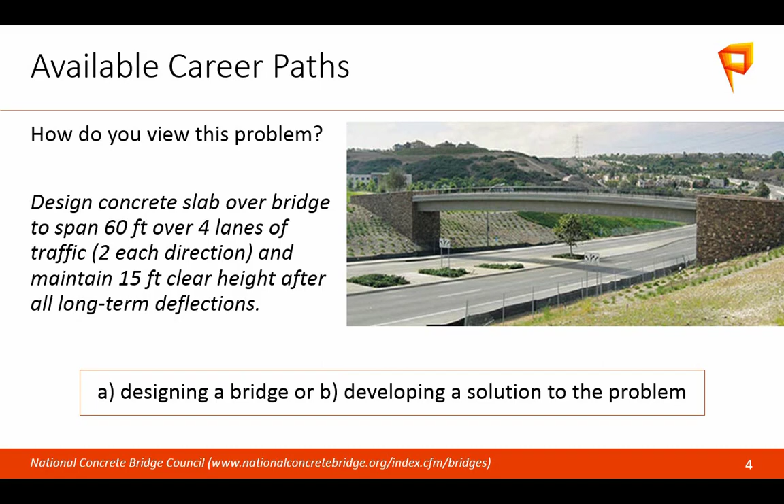There are a lot of different options for career paths in engineering, and how you view that first problem may inform what career options you'd be a good fit for. As engineers at our core, we are trained to solve complex problems by applying knowledge and principles to that problem, and that is not necessarily exclusive to a single career path. Through an engineering degree, you have a lot of different options in front of you. Someone who chose A, designing a bridge, may be more in line with something on the left-hand side here, more traditional, whereas somebody who views it more generally, as developing a solution to the problem, may find themselves a little more to the right, in terms of the options they're looking at.

This list is really just an attempt to categorize some basic options. By no means is it fully inclusive, and I don't mean to offend anybody by these different buckets, but this is just a very basic view of it.

In terms of traditional engineering careers: design engineer, contractor, professor. Less traditional: construction engineer, designing formwork and shoring, forensic consulting, facilities. On the right-hand side, careers where you're still utilizing that problem-solving skill set but in a different application, maybe outside of engineering: attorney, developer, finance. These last three are specific because some of my classmates are doing this exact thing from undergrad and graduate school. My classmates from Florida and Texas are basically across the spectrum on this list, and all of them still benefit from their engineering degree.

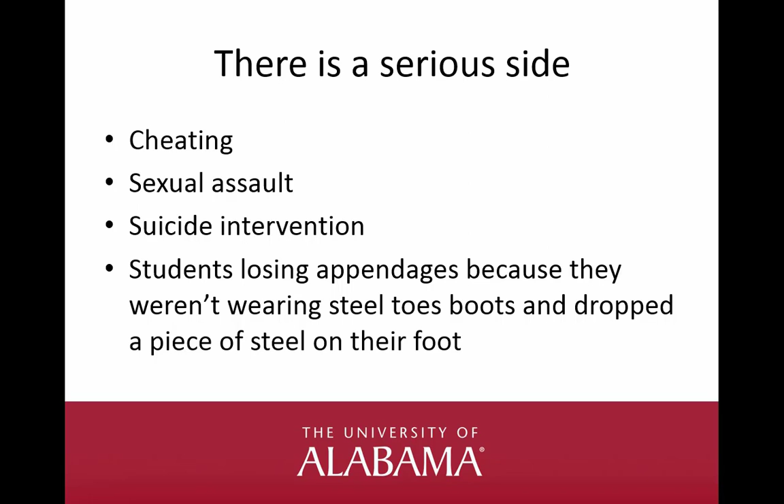Do not wear sandals in the lab. They did get the toe reattached enough that I think he can bend it mostly. That was fun for the janitorial staff to clean up all the blood. So please don't do that.

Professional licensure. Our previous speaker is a PE. I am a PE, and I think several other of the speakers are PEs. It's a great thing to have. But specifically to academia and faculty, if you go and search for academic jobs right now, I guarantee you about 90% or more will have a line somewhere that says, must have a PE or ability to obtain a PE in 4 years. Why is that?

Well, some states require that design courses in engineering curriculums must be taught by a licensed professional engineer. The states that don't require that explicitly are moving to consider that. And ABET, which accredits civil engineering and other engineering programs, is moving towards having more and more faculty be professionally licensed. To some degree, it indicates that you're not always up in the clouds, because I'm sure you've had professors that you would be troubled if they designed a bridge, because maybe they don't know how it works in the real world. So this requirement of a PE is kind of to address that issue.

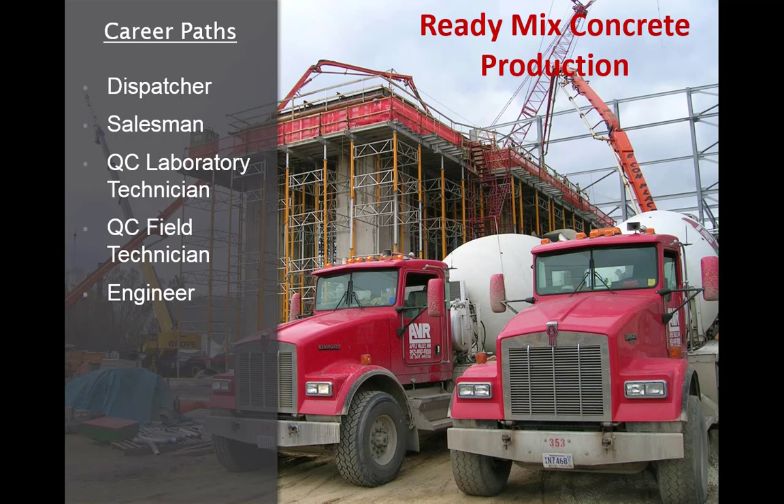We've got concrete all the way from 100 PSI, kind of lean fill flowing sand, all the way up to 18,000 PSI concrete for high-rise structures. It's amazing the amount of things we can do with concrete, and it's just a ton of R&D. I have 3 lab staff, and that's all they do all day, just make concrete we haven't even produced in mass quantities yet, for the next stuff, admixtures, that kind of thing, and figure out what we can do better.

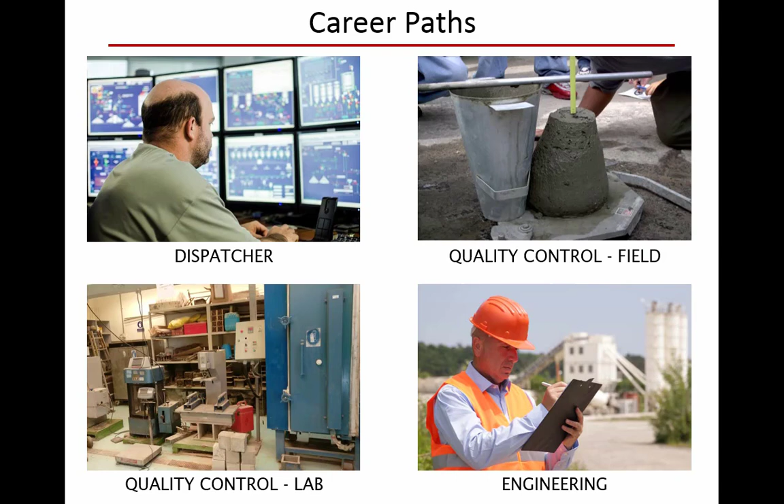So that's what a lot of those guys do for me on any given day. I have 3 field quality control guys as well, so they'll go around to the jobs every day and make sure that concrete is meeting specifications. They do a lot of arguing for us. They're kind of our last line of defense to make sure that truck that shows up on site gets poured, because the last thing we want to see is that truck come back to the yard full of concrete and then we have to throw it away.

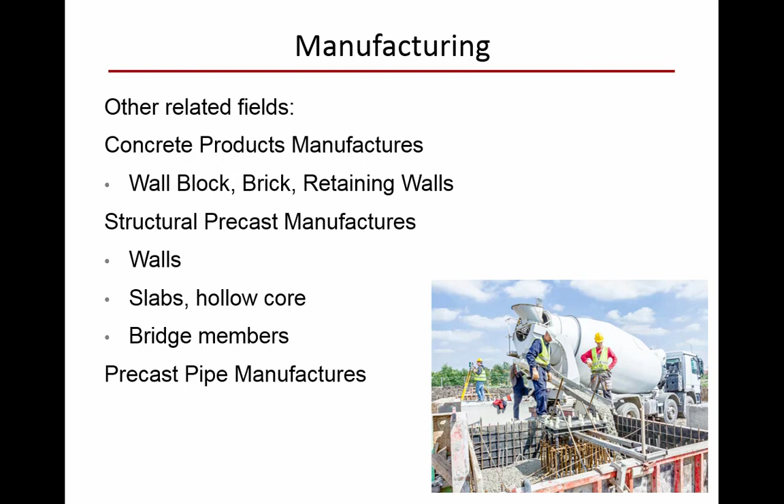So I'm just going to mostly focus on ready-mix concrete today because that's what I do, but these positions exist in pretty much all of the manufacturing fields. There's precast operations, making concrete precast elements at a yard, very similar to our plant, but they'll make and cast that thing there, let it get hard, and then ship it out to the job site. There's precast pipe, there's all the concrete products, making retaining wall block out of concrete, and all these other kinds of stuff. They'll have all the same job opportunities that I talk about in a lot of those other facilities. And with the consolidation of our market, there's not a lot of really small ready-mix producers anymore. They're kind of grouped up and become monsters like us, making 1 million yards in a year. They need all of these jobs filled.

So ACI impacts. I went to about as much school as you can go to, and I can tell you what I do on any given day was not taught in school. You'll learn about concrete materials in school for maybe a semester at best.

And then after that, you just do this funny hash mark whenever you're talking about concrete in a drawing or something like that. You don't really ever get to know how that concrete is really made. You'll know the basics, of course, but you'll have absolutely no idea on how it's really made. If this sounds of any interest to you, just call up your local ready-mix producer. I guarantee they'll give you a plant tour, and you can actually go visit a plant and see how concrete is made.

I got the lion's share of my education from going to ACI and networking with professionals, meeting all of the people that were doing some of the things we were trying to do. I remember when we started to get into self-consolidating concrete and mass concrete, I made sure I got myself on the SCC committee or the mass concrete committee to learn as much as I could.

With SCC concrete, you're making concrete that looks nothing like any concrete you've ever seen before. It's super scary. You're going to send this truck out with a 22 to 26 inch spread. We had a lot of times where we'd send it out to the job and the contractor would reject it, saying, you had to have screwed this up, this doesn't look like anything I've ever seen. And we'd say no, we spent a lot of time making sure it looked like that, just trust us, it's going to be okay. All the while we're thinking, man, I hope this turns out right, because this is the first time I ever made this.

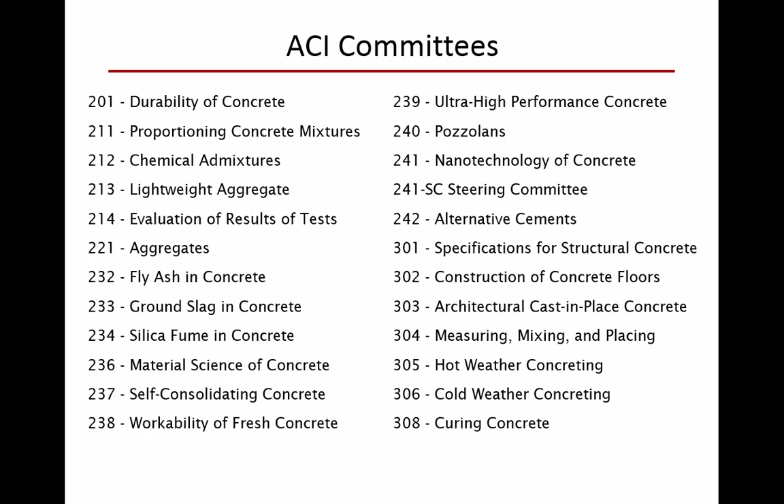Job opportunities, it's amazing what you can learn in this job in pretty short order. So this is just to give you a little glimpse at the numbers of what a day looks like in ready-mix concrete.

On any given day, we'll have orders being placed with our dispatchers. We'll have 100 plus contractors that we work with, and they'll be ordering concrete for 200 plus jobs on any given day. Each one of those jobs will have somewhere between 5 to 10 mix designs that contractor can choose from. Contractor A is going to be pouring footings today, he wants 50 yards of that, and he wants a truck every 10 minutes. So that's what that dispatcher is putting in. Hopefully he chooses the right mix, and all of that goes according to what it should.

And they're going to send those orders out to the concrete plants we have, hopefully strategically placed around some type of metro area. Those plants are all different, in different locations in the city. We have 10 plants in and around the city of Minneapolis. They all have different cement and fly ash combinations, they all use different aggregates, they have different batch men, and they have one of these 1,000 mix designs to choose from. Again, hopefully they're choosing the right one, hopefully we've sent it down to them that says use mix 1, 2, 3, 4.

And then they're going to put that concrete on one of 150 trucks that we have. That truck is going to deliver that concrete, and it's going to deliver it in traffic, in weather, all the while it's getting old. Hopefully it gets there on time and in spec.

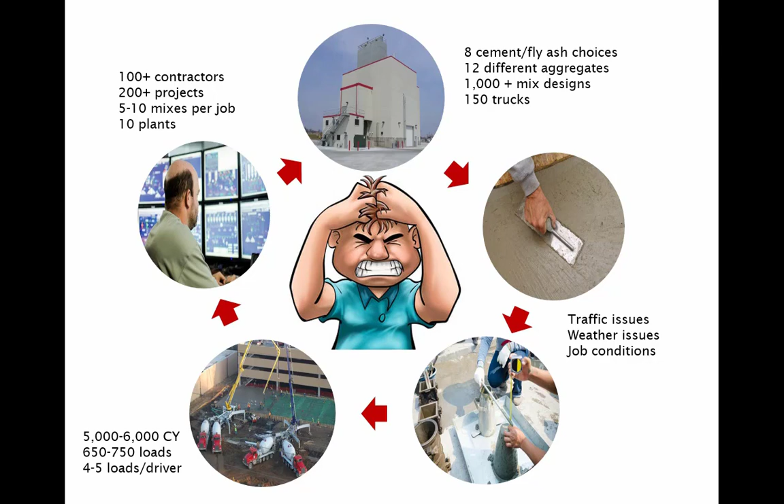You become a huge resource. So you're constantly working with contractors, and all they want to do is get the job done. They know what they need to do. They're going to be heavily reliant on you to give them what they need to make their job easier for them and their guys out in the field.

So I can tell you probably 90% of what I do now is to take concrete and get it to do what it doesn't usually like to do. I'm getting it to flow into places, getting it to get higher strength earlier, getting it to set faster - getting it to do all of these things that I know I can do with concrete, but they haven't learned all of that.

They're contractors, a lot of them know quite a bit about concrete, but with the chemicals we have today and what we can do with concrete - when I started at AVR we had 8 admixtures, now we're plumbed for 24 admixtures in some of our big plants - there's nothing we can't get the concrete to do, provided the contractor calls and asks, hey today I'm going to try this, I need to pump it 200 feet through 3-inch line. There's any number of things we do on any given day, and they become a huge resource in helping that contractor figure out his problems.

And once you do that for a contractor on a couple of occasions, then you kind of have a friend for life, and they're going to call you. I get calls - probably 50% of my calls now are on jobs that we're not even supplying the concrete on.

Like, hey, I had concrete yesterday, it didn't look quite right. Is there something you think we should do? I'll tell them, hey, I think you should call your supplier and ask them if they have X, Y, Z, or ask them if they can do this, or they have a mix that looks kind of like this. When they're outside our market, many times I'll just send them a mix design and have them see if they can make this. That's a huge resource for them, and they're super appreciative.

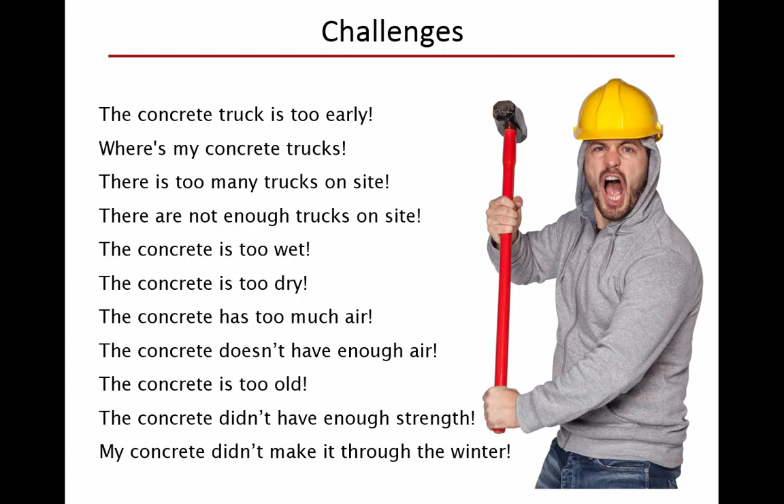So that's all I have. It's a pretty crazy industry, nothing I thought I'd ever get into, but there's a huge number of benefits. The amount you learn in pretty short order is amazing. Great individuals, and they pay super well, as you can imagine. We pour 750,000 yards of concrete a year, each one of those yards is $110, $115 a yard. There's a boatload of cash coming in, so they pay you well.

Another huge benefit is we have no time for any kind of paperwork. It's just do it. There's not a single piece of paperwork that me or anyone who works for me fills out. We have no time cards, we have nothing. It is get it done. I'm going to give you a job, and I'm going to assume you're going to get it done. When you're not getting it done, we'll have a discussion. As long as the concrete's going out there and it's not getting rejected, I'm assuming you're doing your job, and we can talk about vacation time in the winter sometime.

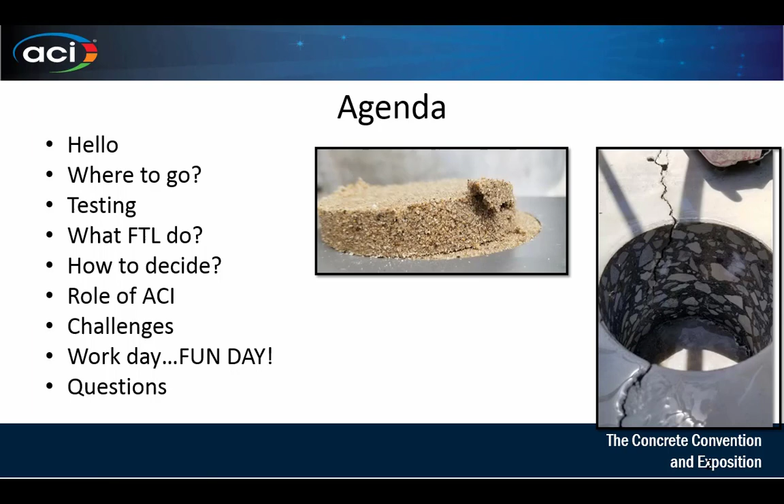I finished my degree in July. Well, let's go to the agenda - just to use it because I put it there. This is the agenda, great. So I finished my bachelor's degree at the University of Puerto Rico at Mayagüez in July 2017, last year, sorry. I started at Flood Testing in November last year, so it's more or less about a year now.

Currently, as they say, we are all liable, so thankfully I don't have the PE yet, so I will be liable at some point. I'm in that way. My career path is kind of the opposite of Mr. Edwards. My background is concrete, and I end up being a geotech.

Construction - I never knew there was a business called testing services in construction when I was in college. So when I got approached by the boss, I was like, oh, what is testing? What does that mean? I know ASTM exists. I know you have to deal with the quality of the stuff, but how is that a testing business? So it's part of the construction part, because you need to make sure everything is working.

So at some point you are all going to get this - this is my actual diploma from the University of Puerto Rico. And then you are like, what do I do? Like, I have a piece of paper that says that I know how to do something, but man, yeah, about that - can be hard sometimes.

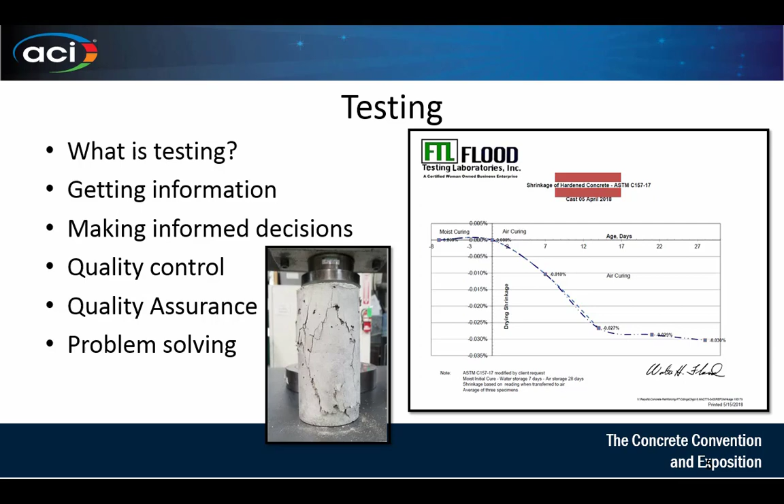Oh, we dumped the truck there, we poured concrete, and it was 10 below. Did you put air on it? No. Yay, take it out. That type of problem solving - and then you have a sheet pile, and the sheet pile is moving, and they call you, hey, we have a crack, 7 inches, and you're like, hey nice, good crack, and you run. But then you have to go back to them, call, and solve it. So this is part of what we do.

The lab has been around for 100 years - 105, to be more precise. So we kind of poke into everything in the Chicago city, from soils to asphalt to concrete to whatever. Basically, if you can build it, we can test it.

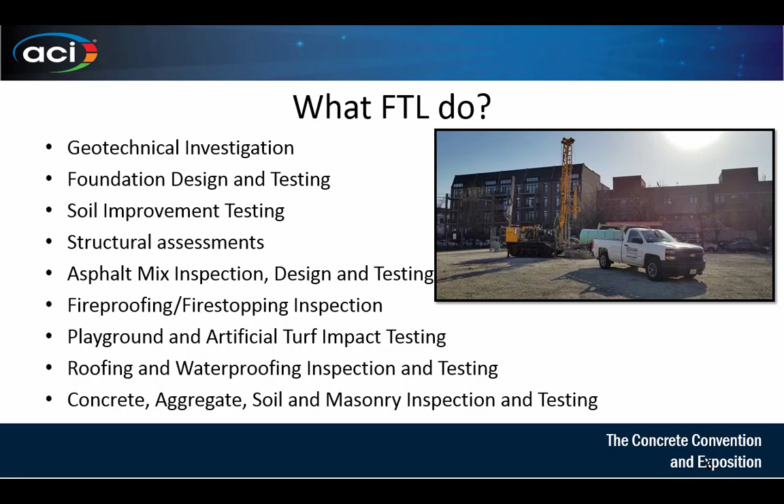That's pretty much it. But after you know this, how do you decide, when you're out of college, what you want to do? It's weird - in my case, I wanted to do my PhD and go back to teaching. That was my career path. That's what I wanted to do.

So I did research for 10 weeks at Oregon State, and then I didn't get the funding. So what do I do now? Well, let's go to work. But how? So the how is...

It's gotta do - so you have to talk to professionals. That's why you come to ACI. You talk to professionals and say, hey, here you have a panel: professors, industry, designers, testing industry. You ask questions like, what do you do, how do you do it, why do you do it. But in my case, I like getting paid for breaking stuff.

But it's your interest and finding your own path. Even though we all have a civil engineering degree, we all don't like the same stuff. So it's you asking questions. And ACI is a very good place to ask those questions.

The role of ACI is very important. Why? Because when you go to a committee, you know the rules of the game. Because if you like to design bridges or design structures, you are going to use ACI 318. Period. There is basically no way around it, unless certain different situations, but you need to use the ACI documents to design and perform.

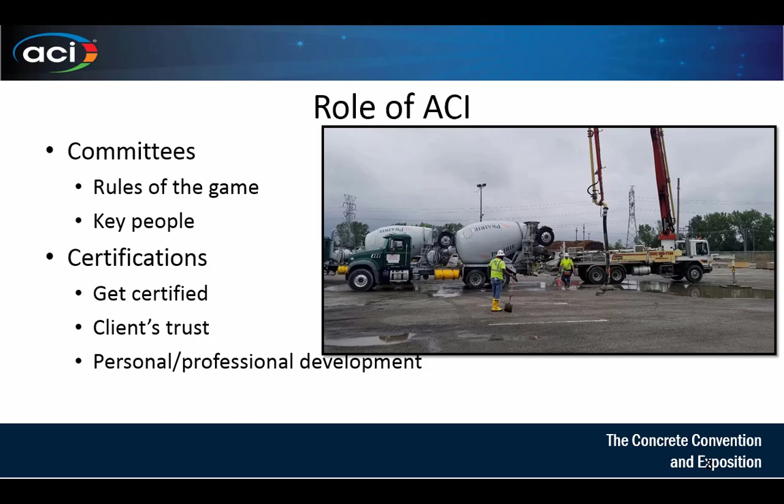As I told my friends, if you're a doctor and you make a mistake, you just put them six feet under and tap the dirt - done. If you're a car mechanic and you make a mistake, the car will be back in two weeks, that's it. If you're a plumber and you make a mistake, you just change the pipe. But if you're a civil engineer, your mistake is going to stand there for 50 years, or it's going to go down, which is worse. So think about your career, where you want to go, and also help with your professional development as another achievement - it looks good on your resume.

The role of the ACI - networking. I think it was in basically all the preceding presentations, networking was there. Why? Because you get weird jobs. A weird job is like, oh, we have this concrete with these specs, and you're like, what is that concrete? I have never seen this stuff in my life. You ask people, you go to that committee, and when you get that job, you know who to call - hey, I have this, have you done it before? That's weird jobs, and they appear. They are going to come by because there are weird people out there.

Equipment - you go to the exhibitors and you're like, ooh, pens, ooh, notebooks. No, that's not the importance of the exhibitors. The exhibitors are there to learn what they sell and why. They have an air meter - Humboldt is here, they're not paying me, Gilson is also here. You go there, and if you've never seen it, you ask what is this for, how does it work, how do I take it apart? Because that's how you learn what tools are available for you when you go to the field. You see the compression machine that Forney had - this is a good company because they help with student competitions, and they have the compression machine. You go there, you ask questions - how this thing works, how much it costs, how do I fix it, how do I break it? Because yeah, I broke one, but that's another story - I blew a hose. Anyway, you ask because those are the tools you're going to use when you get to a job site.

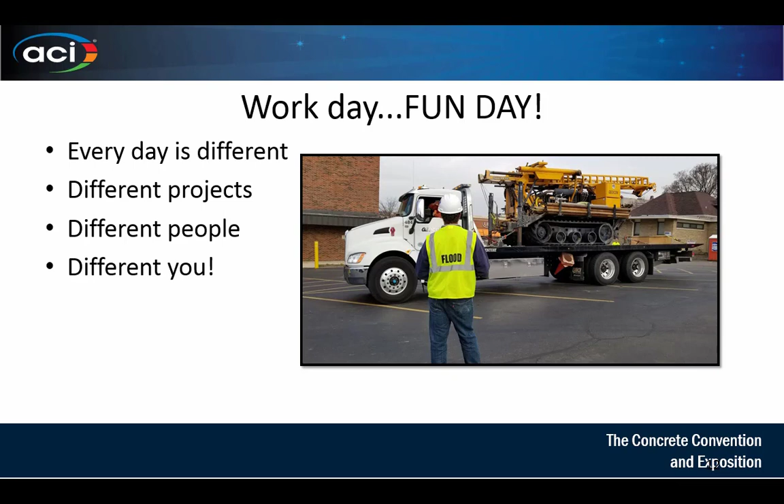And then the guy is like, no, we're not done, you have to wait 20 minutes, and you're in the corner like, yeah sure, no problem, I'm fine. But it is fun, it's a good view. And it's a different view every day, because what you learn in one project you can apply and use in the next one, and it's such a rewarding experience - okay, I messed it up in that one, but in the next one I do it right. The first time I did floor flatness, you have to do it at 90-degree angles, and I did it in diagonals. It was a beautiful report, but I learned my lesson - at least the machine still works.

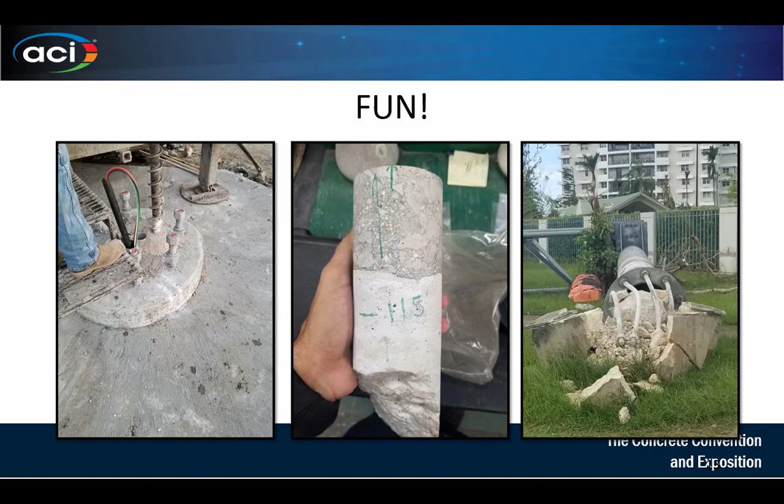Sometimes you're just hanging there and you feel like a photographer and an artist, and you just take pictures of the slurry out of the drill rig because you're bored. Sometimes you're drilling and you discover new soils—it's called blue sand. But no, it's just that there was a cleaning company somewhere that decided to throw solvents in the soil, and there was slag in the soil.

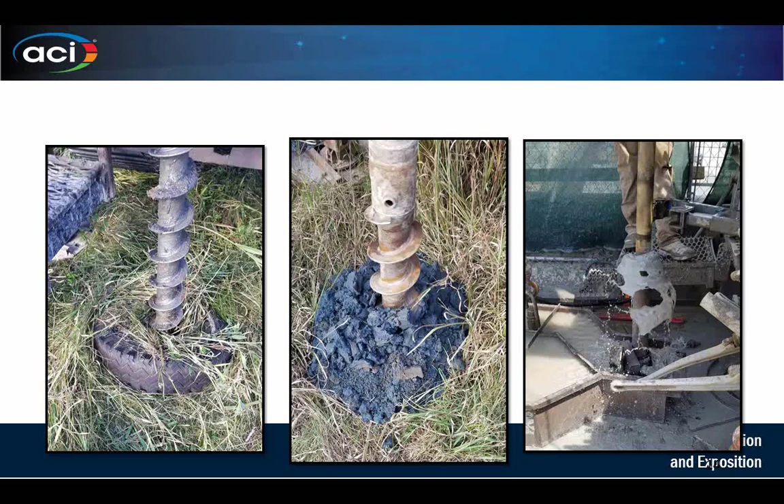Ta-da! There you go. And sometimes you have very good drillers, they're very precise, and they get a tire. Don't ask me how, but he sent the auger down and the tire started spinning, and we were like, what is that? Hopefully nothing alive was there. And that's usually nice, not finding living things under the auger. But yeah, you find it's fun, trust me, it's fun.

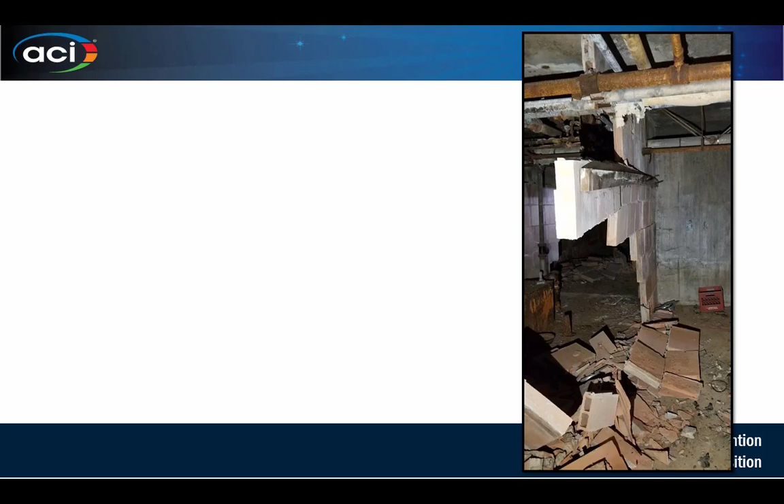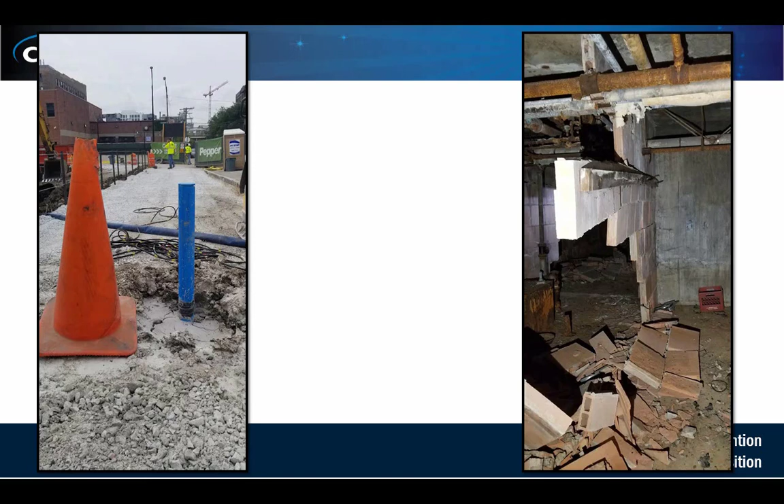And then you see this and you go like, oh, it moves, okay? So this is the type of stuff you see. That's a pipe used for an inclinometer reading, you just drop a level and take it back, it's a very easy test to do. But sometimes people don't know how to drive, and you have to restart your machine. See, that happens.

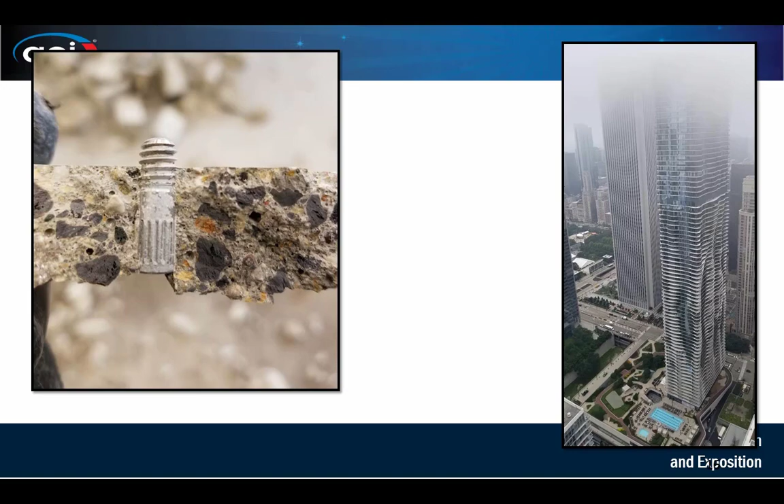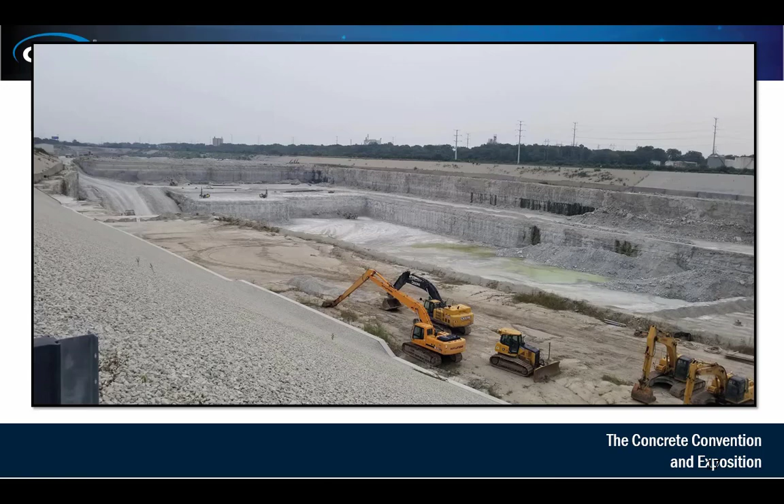But this is what you get. This is the vista of Aqua from Wanda, which is not done yet. So you get so many different scenes and pictures, and you get to see the city in a very different way. And the thing I like about my job is that I can go from doing research in the lab that my boss hasn't allowed yet, but I do it anyway, playing with ASR, shrinkage, cementitious efficiency and fly ash, and then go up there and just watch the city and enjoy where you're living, enjoy what you're doing. You can go from a very big hole, huge, to the tallest building in the world for 25 years, just to look at it.

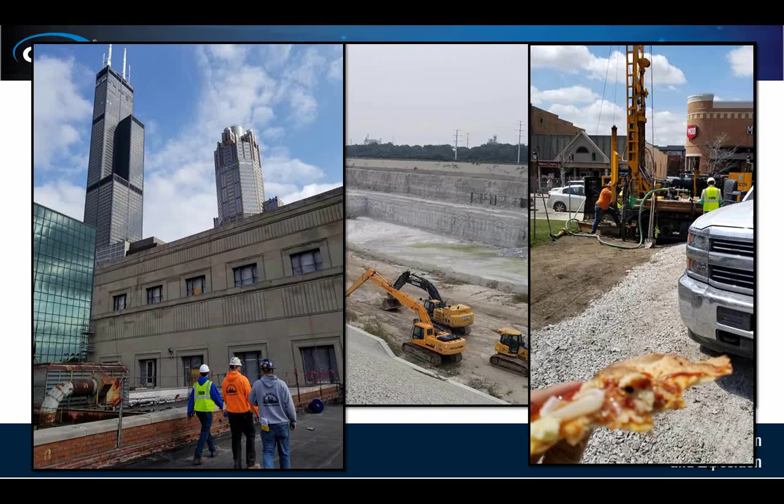Or you just eat pizza in front of a drill rig while they are drilling, which is sometimes nice. Yeah, that's my pizza, it was very good. It doesn't have pineapple because, no, pineapple doesn't go on pizza.

No, okay? But what I wish I knew was that I was going to have this much fun. And if I knew that, I would have actually paid attention in my calculus class and passed it the first time, and finished sooner. Because if you do what we told you to do—talk to professionals and find your space—you're going to enjoy it, and it is a lot of fun.

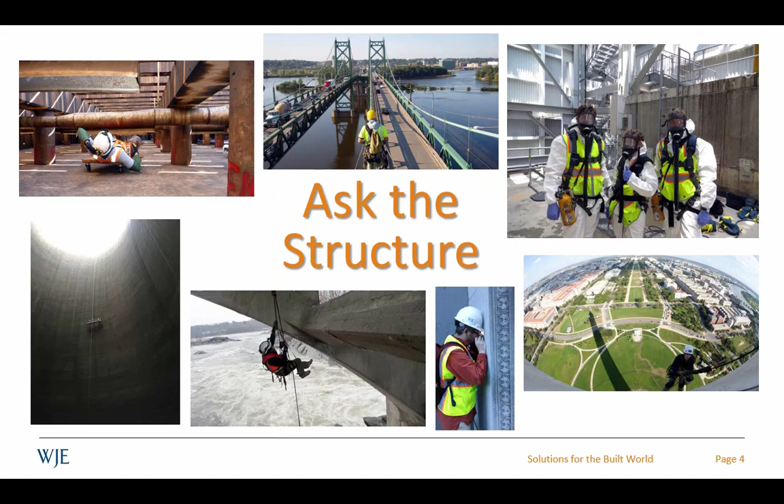When a client comes to you and tells you they have an existing structure—because a lot of what we deal with is existing structures—and they have a problem in that structure, the first thing you want to do is go out and take a look at the structure, because that might give you a key to your solution. Every structure is also unique; they are all different, you can't just rely on drawings. So a lot of our work, maybe 25%, will be going to the field, doing inspections, taking material samples from the structure and testing them in the lab to understand the problem and provide our clients with the best solutions.

The next thing is the diversity of projects. This is something not everyone knows. When I was a graduate student and someone said forensic engineering, I would think that's people who, when something collapses, go out and look at it and try to figure out why it collapsed. This is not all what we do. We do that sometimes, but a lot of our work is on repair, rehabilitation, and figuring out problems.

You would be working on several projects at the same time. They don't usually tell you this, but it happens—you get in the morning and find a new project you need to do now, and you have 10 other projects you're already working on, and you need to provide reports for all of them. So we have a lot of diversity in our projects, and this also includes diversity in the services consultants provide. You can be an expert in many fields, like non-destructive evaluation, structural health monitoring, which is what I do a little bit, load testing, repair, corrosion, service life prediction. There are a lot of fields you can get your hands on depending on your interest and, of course, your background.

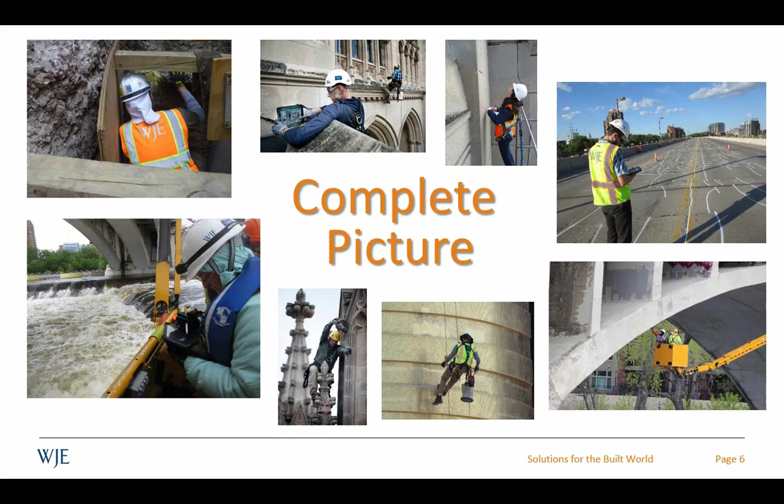The third thing is a complete picture. A lot of time in your master's or PhD, you're focusing on one thing. Like I was doing acoustic emission in my PhD, that's the whole thing I was doing for like two years. And I'm doing acoustic emission now at WJE, but you're not doing it just to do it. You're doing it to solve a problem. You always need to take a step back, and instead of focusing on the task or your area of expertise, look at the complete picture, understand the problems your client has, and try to provide a solution for this client. Because consulting is all about solving problems, solving a puzzle.

The last thing, which was included in all the other presentations, is always learning. Even though I do non-destructive evaluation, even if I know how to do impulse response, every structure is unique. They are all different. You can't just go out and do the exact same thing and expect to get the same answer from a different structure. So you'll always be learning. In my first year, I was actually trying to educate myself on a new thing every single week. It may get lesser as you gain more experience, but you will always be learning. You have to expect that.

So this is just a general background. I now want to talk a little bit about more project examples, just to give you a glimpse of what I personally do and what you can do if you choose consulting as a career path. These may not be the biggest projects I worked on, and a lot of our projects are about problems. Most of our clients don't really like to say that they have a problem, so I'll be limited on the amount of information I can share. It'll mostly be pictures, and I'll say a few things that I can say and move on.

The first one is one of the first projects I worked on. It was really cool because it's a subway station, 40 feet below ground. That's a very thick retaining wall - please don't take pictures - 40 feet below ground, 6 feet wide. What's interesting here is I'm a structural engineer by education, training, and licensing, and this was not a structural problem at all. This was more of a construction-related problem which turned into a durability problem. When you say durability, it's cracking, delamination, and other things. So we went out, did some non-destructive evaluation testing, then went back to the office and provided repair details, repair specifications, and mix designs for the repair, and we were able to provide a solution to our client.

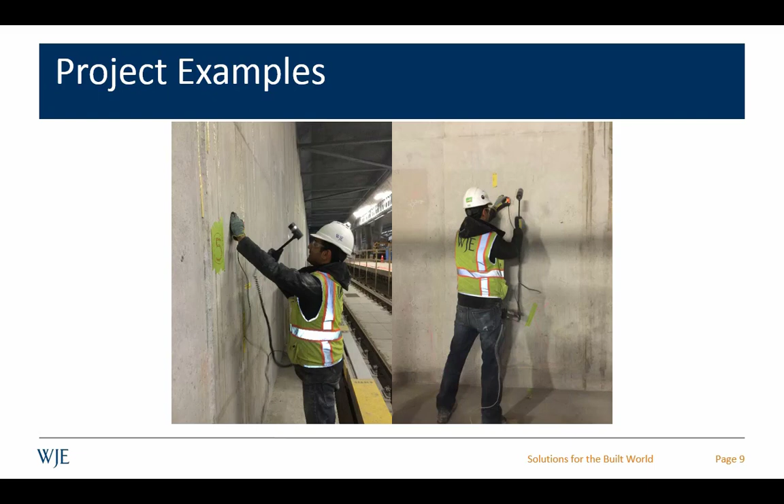The next project is very unique to me for two reasons. You can see here a picture of me with two sensors - these are acoustic emission sensors. Acoustic emission is an emerging non-destructive evaluation technology. It has been used in the field for quite a bit of time, but it's not very widely used. So I got the opportunity to actually install an acoustic emission system to monitor an actual building. That's my system here, that's me installing it. We also have a vibration system on the same building. The first interesting part is that I was able to take what I learned in school during my PhD and Master of Science and actually apply it to a field structure. The second interesting part is that this building has a very unique structural system - it's like a tree.

So you get a concrete core in the middle, and then trusses coming out from that concrete core, and then steel columns hanging from the trusses. They are not touching the ground, so it's literally like a tree. There were only 5 that were built in the US, only 1 in service, which is the one we're monitoring here. So we're monitoring it to keep it that way, and that was unique and interesting, working with that unique structural system.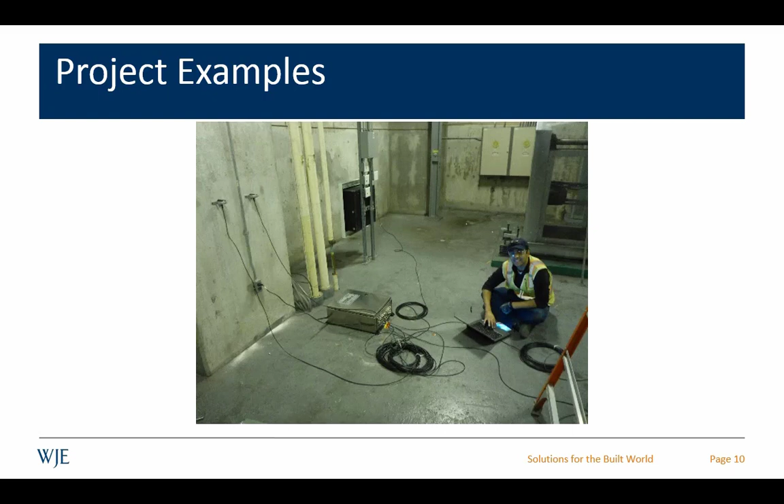Here you can see me in one of the examples of the diverse projects we work on. So that's a storm drainage tunnel, which is a fancy word for like sewers, but for a drainage system, so just water, storm water. There's a lot of these in Chicago. Chicago is a very old city. A lot of them were built in the 1900s, and their walls are deteriorating. So what they want to do to keep them in service is they go in and they line them with different products, and what we are doing here is more of a quality control, quality assurance testing.

But instead of going in, because these are miles long, instead of going in every 50 feet and taking a core to check the thickness of the liner or the compressive strength of the liner, we worked with the contractor to develop a non-destructive evaluation plan and provide it to the owner of these tunnels, and they agreed on it. We went in and did these tests for, I think, 12,000 feet or so. That's like 2.5 or 3 miles, and we do this every 50 feet. So this is a very cool example of what we can do to help the client save a lot of money, because if you core these holes, you need to repair them, while with non-destructive evaluation, you just do it and move on.

So going from a sewer tunnel to going up to a suspended scaffold, this is in downtown Chicago, Illinois, about 100 feet high. And here we are again doing non-destructive evaluation testing to check if the concrete has voids inside or if it's sound concrete.

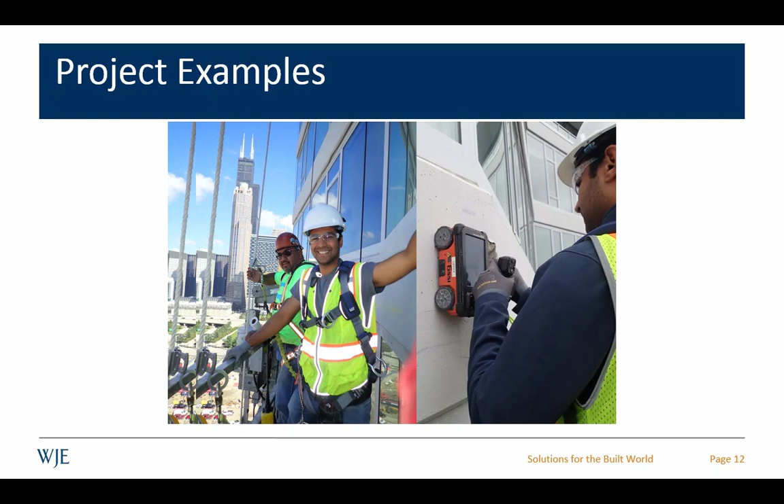So what we do is we go in and turn their buildings into a big lab. We put like 40 sensors on the floors, or more, depending on how big the building is. Then we work with the contractor again, there's a lot of collaboration, to ask him to bring out equipment that he's actually going to use during construction and try it. Then we get this data, process it, analyze it, and then designate safe areas in the museum where the art can stay, or areas where the art has to be moved.

And then we also put in a permanent remote monitoring system during the construction project that can send alarms and give an indication of what the vibration levels are, so you can call the contractor and maybe change the means and methods. For concrete, most of the time they are very safe within these limits, because the limits for art are much lower. But again, it's an area I never really thought I would be working on.

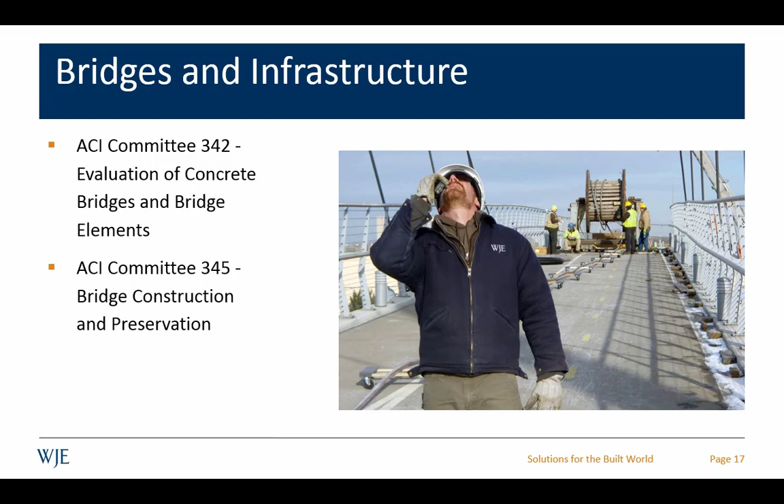There are various fields in consulting. I'm just giving some examples of a field and then what committees might be applicable to it, but this is not an all-inclusive list. If you're working with bridges and infrastructure, there are ACI 342 and ACI 345, two committees you can work with. If you're working in marine structures, ACI 357, which is offshore and marine structures, is also a very good committee that you can work with and learn from.

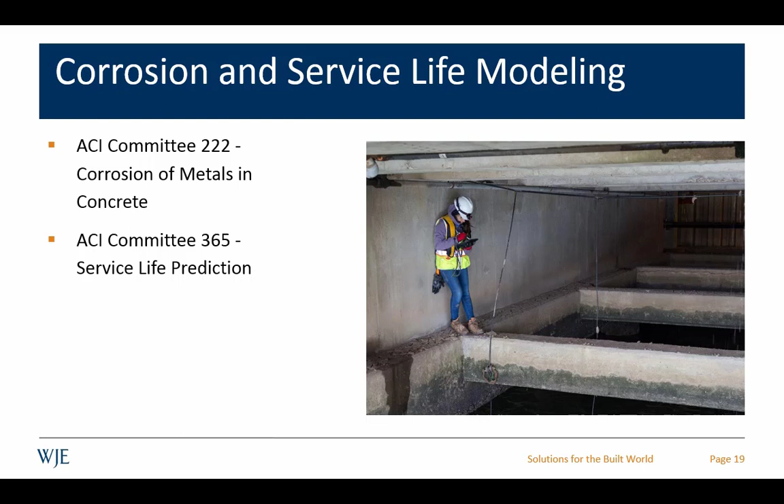Corrosion and service life modeling have two committees, one for each. ACI 222 is for corrosion, and ACI 365 is for service life modeling. If you're doing laboratory materials evaluations, there's a whole suite of committees I didn't put, I just put like 200 committees. All these committees can help you, and a lot of our work is also doing stuff in the lab. My company owns our own lab, we have concrete labs, structural labs, chemical labs, petrographic analysis labs, because they're all tools that can help you solve a problem.

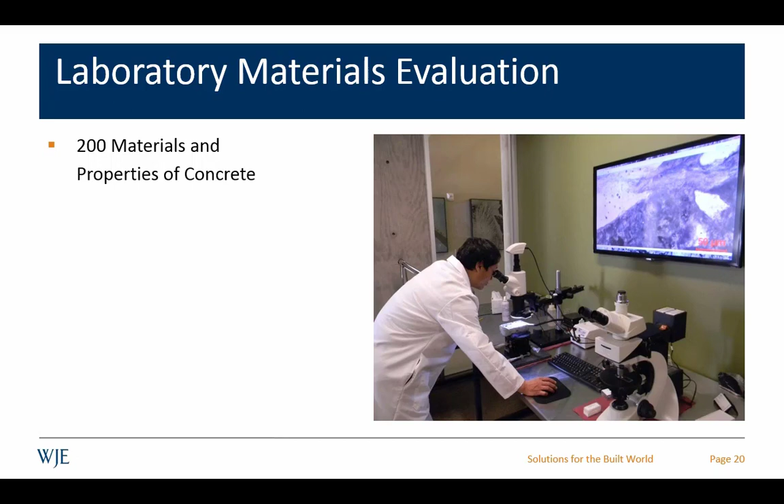Then load testing and instrumentation, again, this is what I do. You can see how happy I was putting some sensors on a bridge here on a 120-foot forklift. By the way, this is when I knew I'm not afraid of heights, because this was my first very high above the ground job. But again, I'm a member of these two committees, and I'm a secretary for this one.